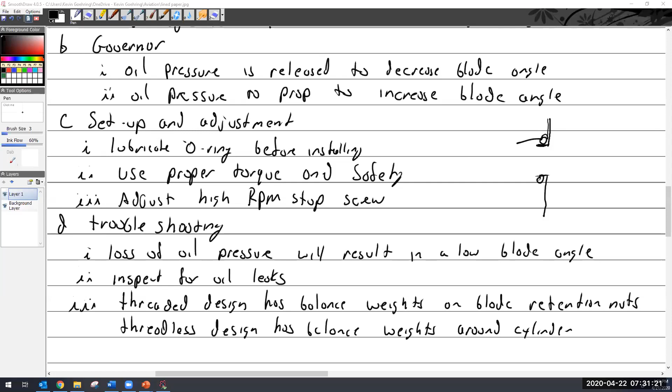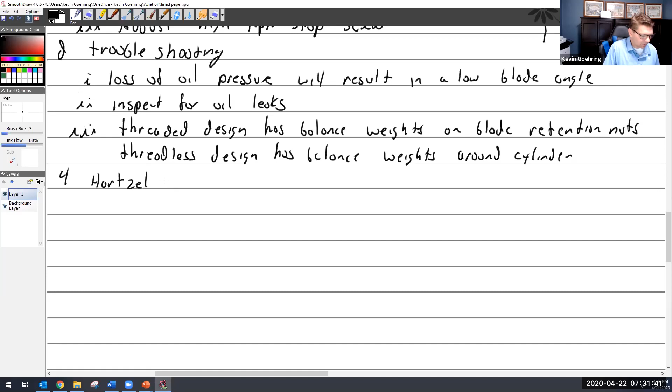All right, so the next one we're going to talk about is the McCauley. Let's move over to Hartzell. So we'll do the Hartzell prop. Let's see which one we're going to do here. We'll just go with this one. So, prop designs.

Hartzell has two types, and it gets kind of confusing. I don't really like the way they call it. Sometimes I think everything with props was designed to be confusing.

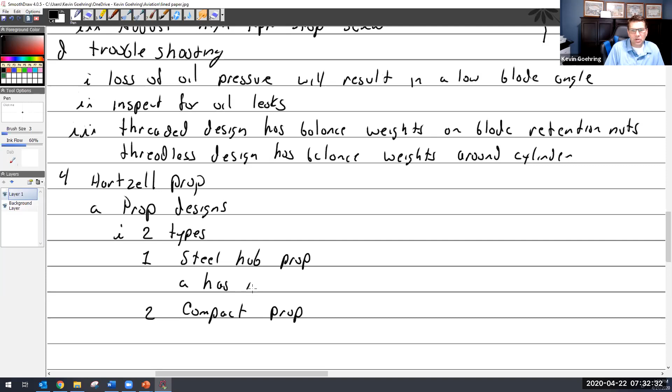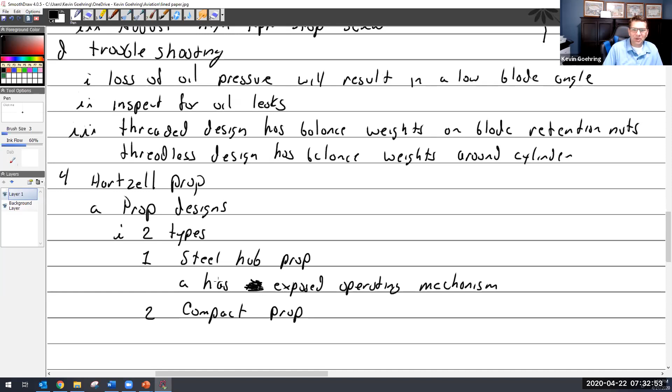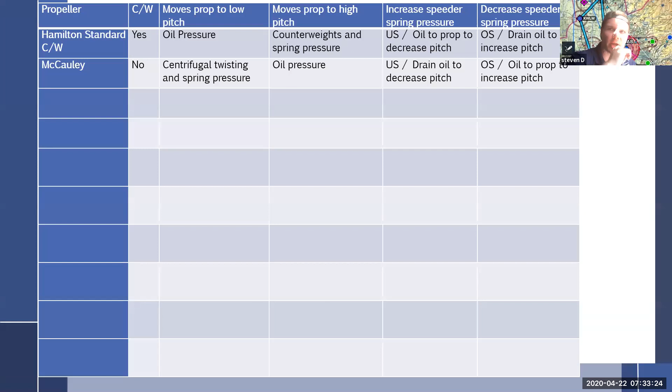Hey Kevin, I have kind of a question for you. As we move towards the Hartzell props, out of the two, Hartzell and McCauley, just on your preference, which ones do you find to be better propellers? I know they're basically the same manufacturing quality wise, but if you were to choose one for your aircraft, or as an AMT...

I honestly have no opinion on this. That's only because I don't have massive expertise. I never worked for a prop shop. But if you asked, would I rather have a Continental or Lycoming, even if I was an expert on these two, I'd still have no opinion. Each one has its benefits and each one has its downsides, so it just doesn't matter to me. It's almost like sometimes you just get what you get and don't throw a fit. So they're all great products.

And the compact, like I said, the reason why I hate it, it's very fat, so I don't know where they get the compact from. I'm sure somebody had some idea and they could tell me exactly what they meant by compact, but the exposed stuff is the steel, and that's kind of what I go for. I go, okay, I can recognize the steel and everything else is therefore the compact.

So let me see here, let me just go scroll through these. Well, I was looking for a good picture, but there we go. It tells me I'm done with pictures. So if we can look at this one, it's a little difficult because it does have the big spinner on there, and you're trying to make heads or tails.

Does this have exposed parts or not? It's even a little hard for me to tell, because this looks like an exposed part here, but I don't think that's it. I think this is more. It looks like a steel one to me because of this long nose. Let me see, get something definitive going here.

Okay, so this one is definitely a compact because there's no external mechanisms. Same thing, just close up. And that's another compact. And that means it's the end of that particular prop.

So let's talk about what we can see. Let me see. Oh, that's wrong with that. Okay, back over here. I think that was the first slide. There we go, first slide. Okay, so what do we got going on here?

I almost don't love that picture, but we can see a couple things. One, there's a gigantic spring in here. Two, it's got counterweights. Three, it's got heated boots on it, which we'll get into much later. But otherwise, that's a steel.

That's a complicated picture there. Let's go to something just a little bit easier for you guys to look at, and I'll go to one more. It's a close up, there we go. Okay, so we've got a couple of things: one, counterweights and a big old spring, and it's got a Schrader valve.

If you haven't heard that word before, Schrader valve is really what we call air fittings. Because it's got an air fitting, that tells me number one, it's got an air charge to it. Number two, it's got a spring. Number three, it's got counterweights. And four, we know we've got oil pressure somewhere. So because it has counterweights, centrifugal force makes it go to a high blade angle.

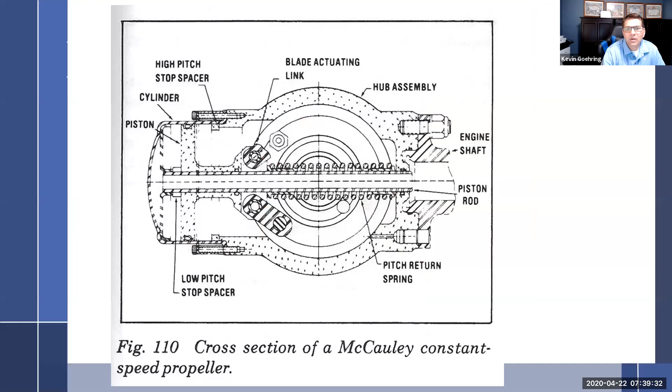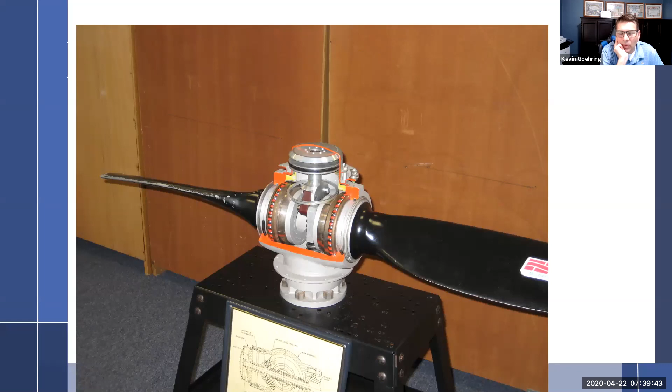In the McCauley, we'll go back one to the McCauley. What made it go to a high blade angle? High blade angle towards feather. We'll go all the way to the beginning picture. There we go. Well, what made this one go? Oil bleeding off. What made it go to oil pressure bleeding off? Centrifugal twisting force is our main force without oil. Centrifugal twisting force will make it go to low blade angle because there's no counterweight. So in this particular propeller, if I lose oil, it's going to go to high RPM, low blade angle, right? Yes.

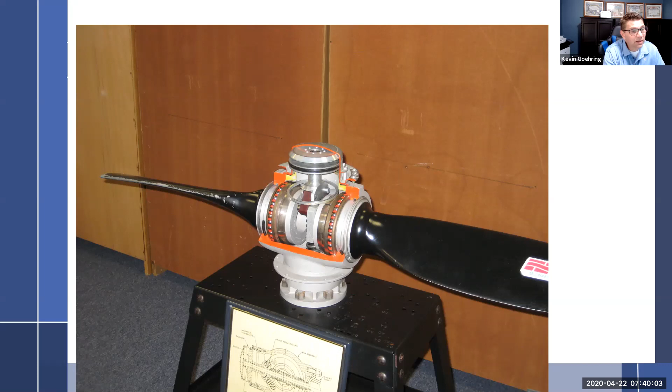Opposite of feather. Now, if I'm flying around in a twin and I lose oil pressure, what do I not want to have happen? This. Windmilling. So if I lose oil pressure, my engine goes away, I have a catastrophic failure, an oil line breaks, something happens, oil spills all over the place, I've got to shut down my engine. I want to be able to feather my prop. And what does it take to feather this one? If it did feather, which it doesn't, would be oil pressure. So that is really bad.

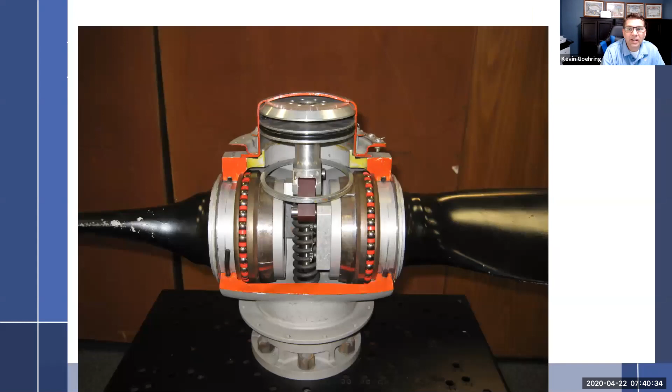So that's why on any sort of feathering propeller, you're going to find counterweights, because when I lose oil pressure and it drains off, these counterweights are going to take it all the way to feather. And that's what they're there to do. That's why on a twin or any sort of feathering propeller, you will always, with some exceptions, find counterweights. I think there's one prop that uses spring and oil pressure alone without counterweights. So you can do it that way, but you have to fight centrifugal twisting force to do it. So this way, centrifugal twisting force is always going to drive it towards feather. So it takes oil pressure to keep it out of feather, if you want to look at it that way.

So if I lose oil pressure, it's automatically going to go all the way to feather because there's nothing else to countermand it. That's why you're always going to find counterweights on a twin, and that's why it's reversed.

Okay, so why then does a single not have counterweights? Is it some sort of, well, if we lose oil pressure, we want it to always go this way or that way? I don't think so. I think it's just a matter of complexity. Why add weight if you don't need it? If you don't need counterweights and they weigh something, just get rid of them. It just makes things more simplistic, and you reverse the governor pilot valve to do something different, and you're fine. So just keep things simple.

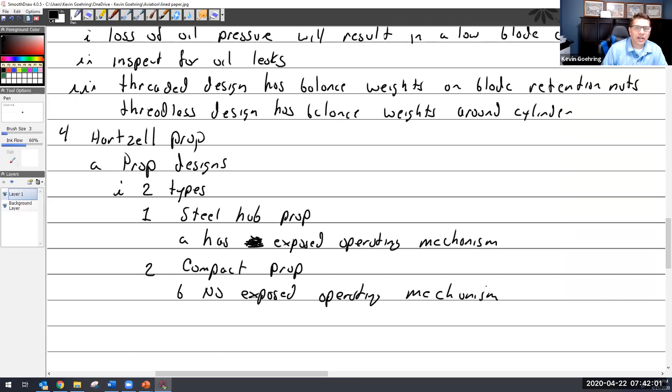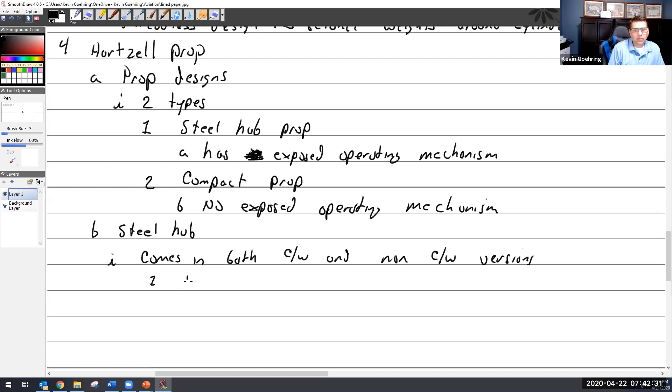So what kind of notes can we put about the Hartzell? We have the two types there. The steel hub, we'll talk about the steel hub. It comes in both counterweight and non-counterweight versions.

I'm not going to take a bunch of your time to write all this because it's being redundant. So what I was going to write is the counterweights use oil pressure to decrease blade angle, and non-counterweight uses oil pressure to increase blade angle. So nothing's changed.

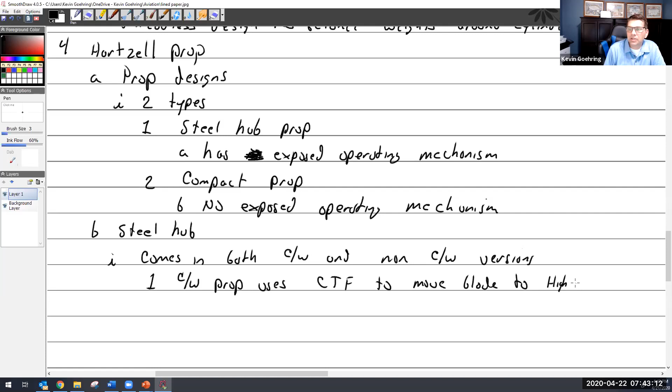I'm going to write one more time, but a little bit different. A counterweight prop uses centrifugal twisting force to move the blade to high pitch / feather. And a non-counterweight prop uses centrifugal twisting force to move the blade to low pitch. That's just, for the most part, not going to change.

So keep that in mind, we don't have to keep writing it over and over, and then you won't complain to me that your fingers hurt, and then I won't get a bill from you going to the finger chiropractor. So anytime we have a feathering prop, we'll put this here: if it is a feathering prop, it will usually, there are some exceptions, have counterweights.

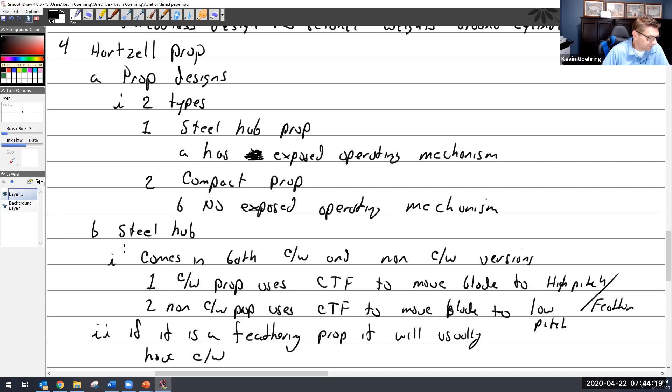Okay, so let's see, the compact hub. It's the more modern style. I'll just put this one: uses an aluminum hub.

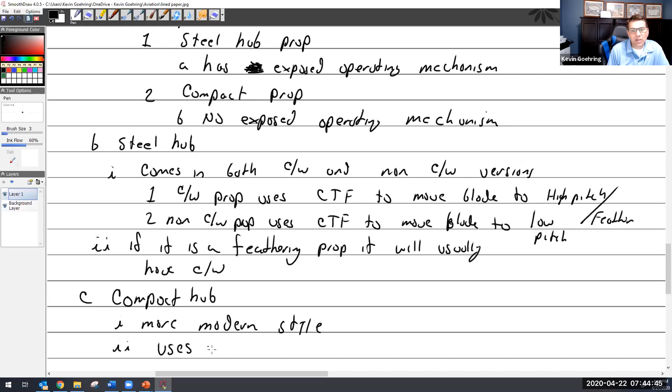Okay, here's where we need to get into some nitty gritty. So the design factor, you should always be able to look at the design factor and just say, okay, counterweights, this thing must be feathering. No counterweights, it's not feathering. You go up to a twin and you don't see a counterweight, I'm gonna start asking some questions. Why does this thing not have counterweights? What's going on? What makes it go to feather then if I lose oil pressure? Because that's always the thing you want to concern yourself with.

But maintenance - as far as props go, if I had to sum up what it is you need to know, what I want to know about working on a prop, really it's going to come down to these maintenance things. So number one, if I've got a McCauley, I know that I've got to be cautious and look for oil leakage. And I know that there's not much else I can do to this prop as far as lubrication goes. This doesn't get lubricated, but if I see any red dye, that's a big deal.

It's coming off right now, not another flight, not a 'hey, let's watch this, let's wipe it.' I see red dye, it's game over for that prop. It's going to the prop shop to find out why. You can argue that it's probably a seal, but every time I have, every story I've heard about a prop shop getting a McCauley because somebody said it had a bad seal, they also found a crack. And we talked about the centrifugal force on these props, and it's tremendous, and you don't need it flying apart. All right, so that's McCauley.

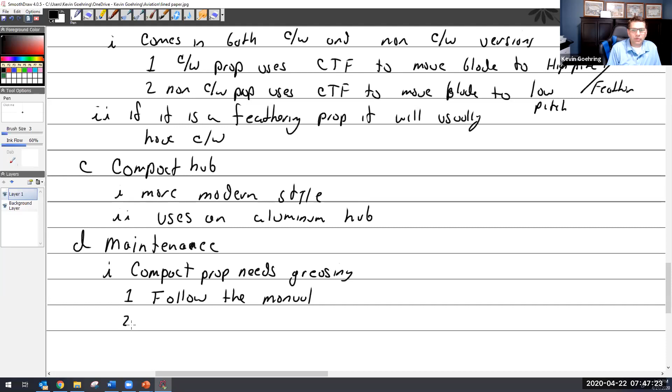The greasing requirements change, and they've changed since I've been in the field. So I'm really reluctant to tell you anything other than follow the manual. Follow the manual, or call a prop shop. That's what they're there for. You get a good relationship with a prop shop, they'll help you out.

But the way it was, you had to remove one of the grease fittings. Remove one of the grease fittings. Also called a Zerk fitting. I think it's spelled Z-E-R-K, Zerk. Like the emperor. No, that's Zerg.

You remove one of them, and then you add grease to the other. What they say is it's preferable to apply grease to the fitting located nearest the leading edge of the blade on the tractor, and then fill that one. I think at one point - I don't even remember if it was true or it's just what people were doing - they were removing a greaser and then filling it until you got fresh grease coming out of the hole.

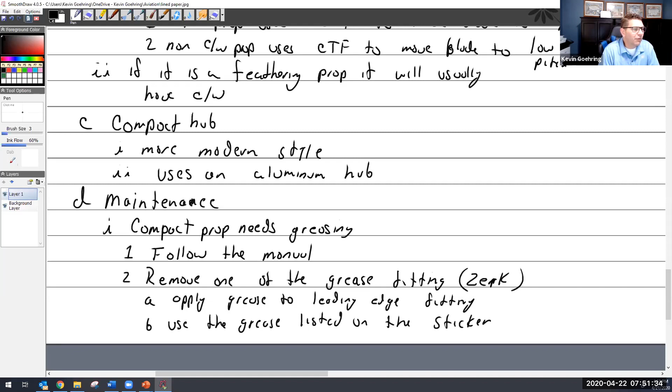The little nub is called a grease Zerk, or the grease fitting. So that's what I'm talking about. You're going to remove the opposite side, put in 4 pumps because you get 1 ounce per pump, and then you're done. Okay, that makes sense. I was always wondering what that was, what that would go to. Let me see if I can find a nice picture here. I have bad dreams about Zerk fittings.

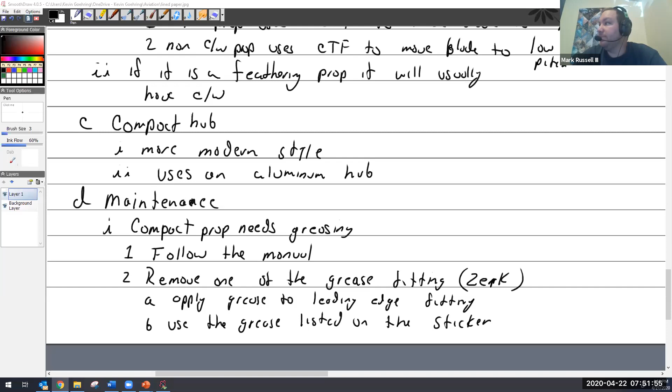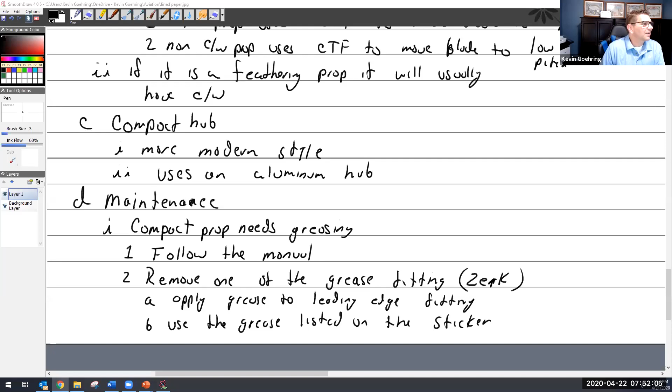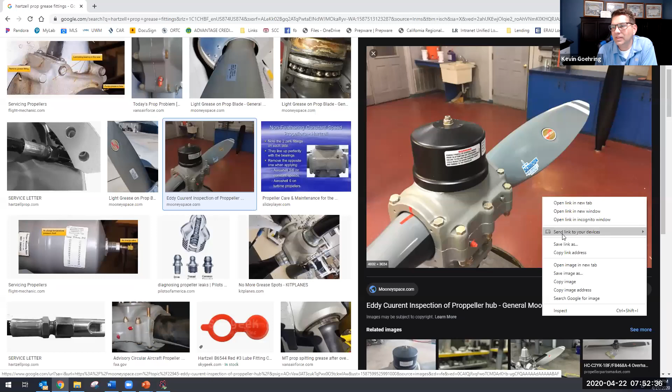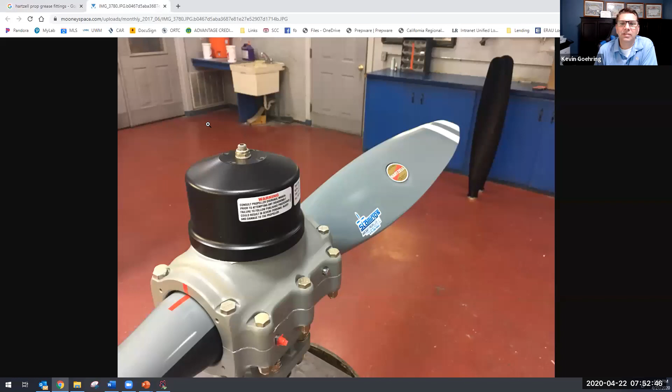Let's see. And there, did I do it right? No, mooneyspace.com, let me see. Open in a new tab. There we go. We'll do that, look at this. There we go, now my mic's in the way, I can't see it. Okay, so there's one fitting, there's the other.

But this one's been capped. But sometimes you'll see this right here and right here, and on the opposite side you'll see the same thing. So what I'm guessing on this one, since I said you always take out one side and grease the leading edge - this is the leading edge here because it's the opposite. So there's leading edge, trailing edge. This is leading edge, trailing edge over there, because that's how it works.

So this is the one you're going to pull out, and this is the one you're going to grease. And on the opposite side, you're doing the same thing. So actually, this goes to this side, and this one and this one are the opposites - these aren't the opposites. So you're going to grease the side on the leading edge and take out the one on the trailing edge, which is over here. And you're going to put 4 pumps in - 4 pumps is about 4 ounces.

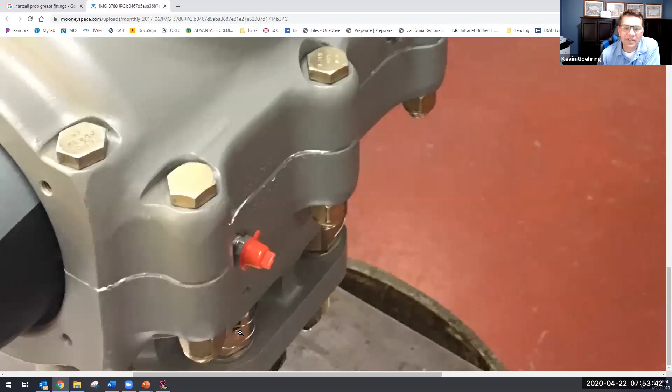Ooh, look at that - those bastard, what do you call them, nuts that are hard to get to, with the safety wire wrapped up in them. But they've got nice little caps on there.

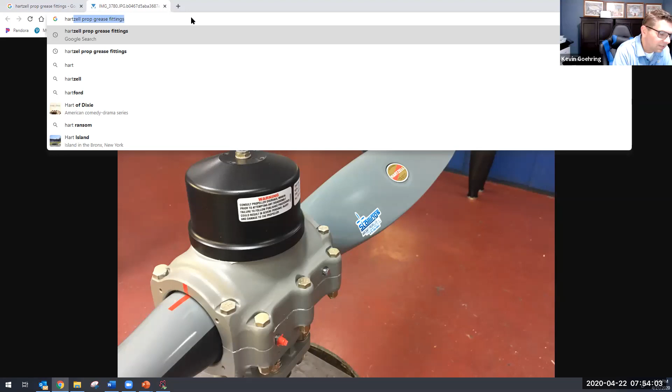Is that the compact style? Yes, absolutely, because it is definitely not the steel hub. Let me see if we got a good picture. Hartzell... so, steel hub prop images. There we go. That's it.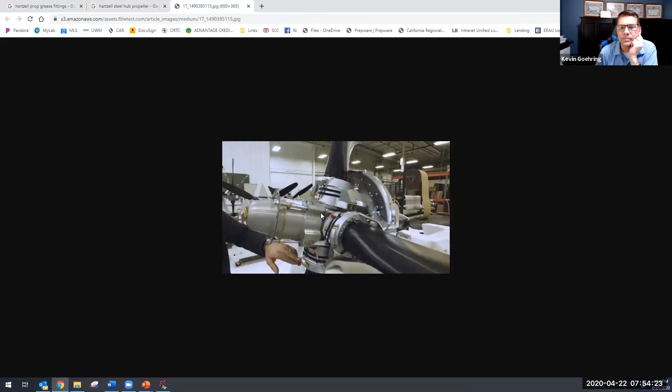Well, that didn't help. But see all the external mechanisms? You can always hit Control plus to zoom in, Kev. Control plus, plus - oh well, I could have done that. I could also hit Control mouse wheel. Woo, but thank you, the other one had a magnifying glass.

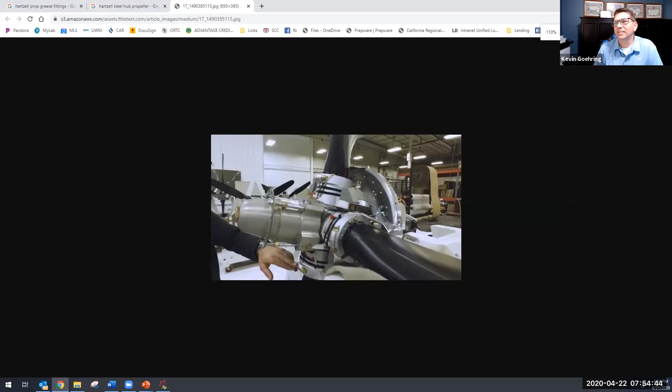All right, so that's your compact. Here's another picture - oh, I like that picture, that's a really good one. So you can see how the external mechanism right here is what I'm talking about. You're going to find this on a PT6 these days, so turbine engines, that's what they're going to be using still to this day. I believe that's the same picture I have - so that's the compact, because you can see the rods coming through here.

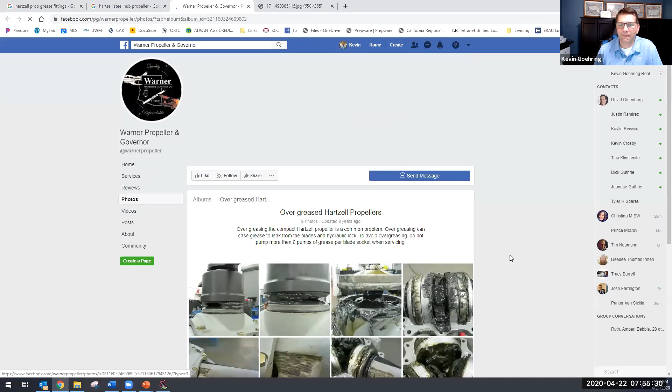So what is it showing, sorry - steel, in the one that says 'over greased Hartzell'? Is it here, right below the... oh, one, the cutaway. Oh, 'over greased Hartzell.' It's on Facebook too. Yikes. Oh, that's excellent.

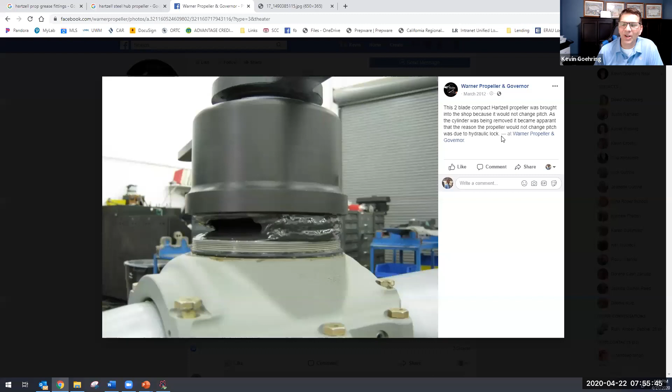Well, this blade was brought into the shop because it would not change pitch. As the cylinder is being removed, it became apparent that the reason the propeller would not change pitch is due to hydraulic lock. Love that. Oh my goodness, oh this is excellent stuff - a little bit over 6 pumps. I think, yeah, yeah, here's where the fittings go right there. Dang.

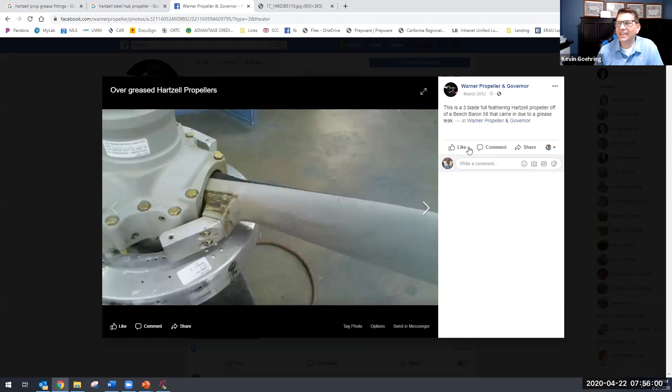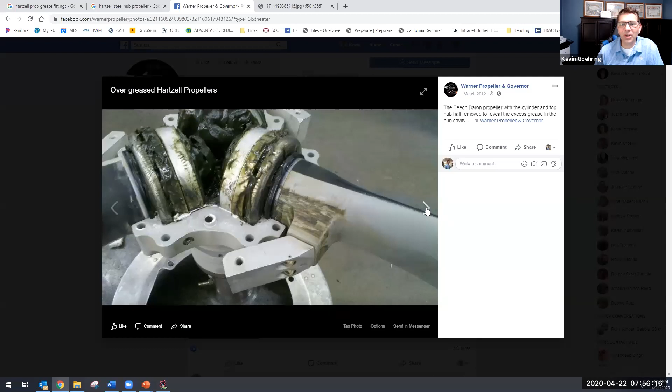Well, this is just a grease leak - or is it leaking because they forced it out? I think I actually had a mechanic tell me that one time, like 'oh, you just grease it till a little bit comes out over here.' Oh no, don't do that. Oh, that's ugly. Oh, there we go. So, all right, good pictures.

All right, so use the right grease, be careful with that grease. What else do I got here? Let's see, blade adjustment - steel hub props can have the low pitch adjusted by adjusting the blade clamps. I'm not going to get into that for you guys. Compact, yep, so we'll move on here.

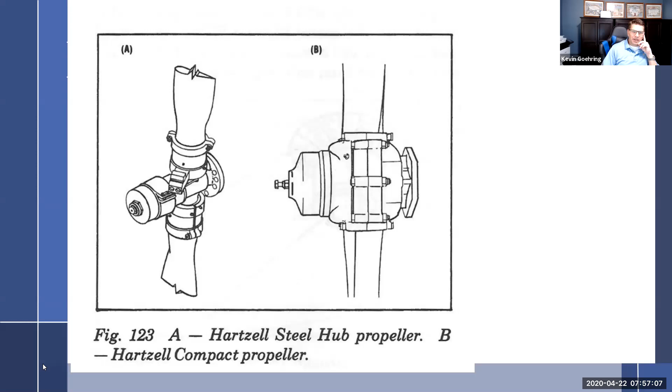So, number 5 - we're going to talk about feathering props. Not that some of those weren't feathering. In fact, we can go over here and go back to where we were, just finish that out. So, all right, so we have the steel and the compact. That is because of the change rod right here - you can tell that it's steel hub, and it's still, everything works about the same.

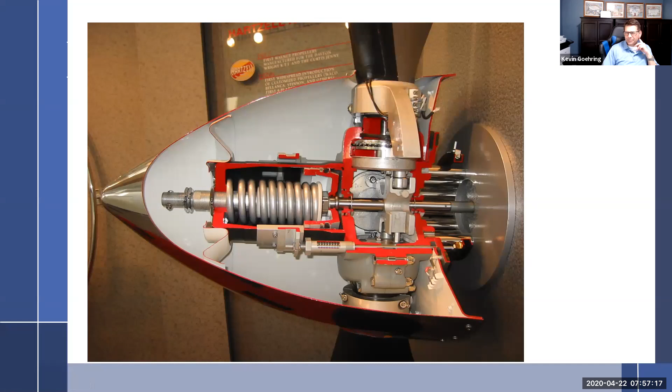No big surprises. And I got to get into the air pressure here. I'm sure I do. Okay, I just kind of go back and forth.

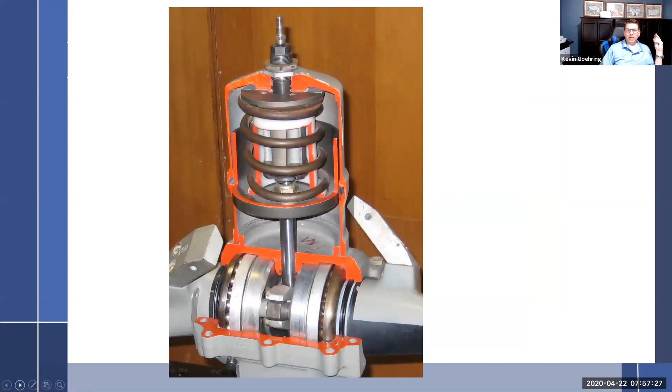The Hartzell steel hub prop is counterweighted. I talked about a non-counterweighted version, so it comes in both. For the non-counterweighted version, centrifugal twisting force goes to low. My pictures aren't lining up with what I'm talking about. If you have a steel hub without counterweights, centrifugal twisting force goes to low. If you have a compact prop without counterweights, centrifugal twisting force also goes to low. We know that everything is pretty much the same.

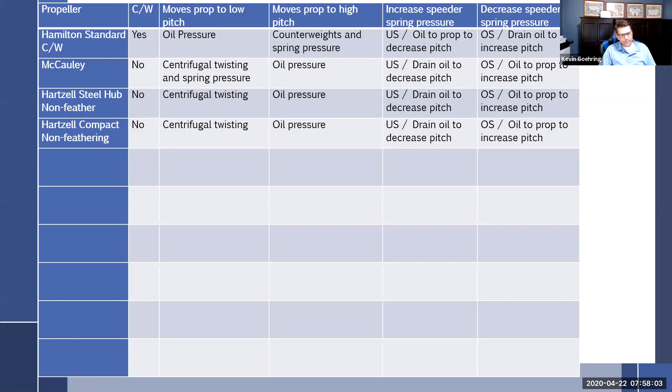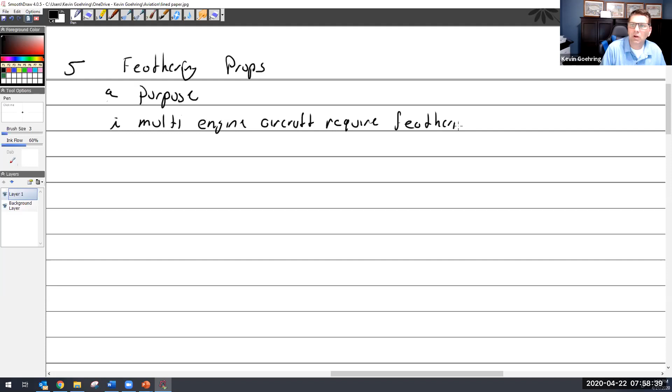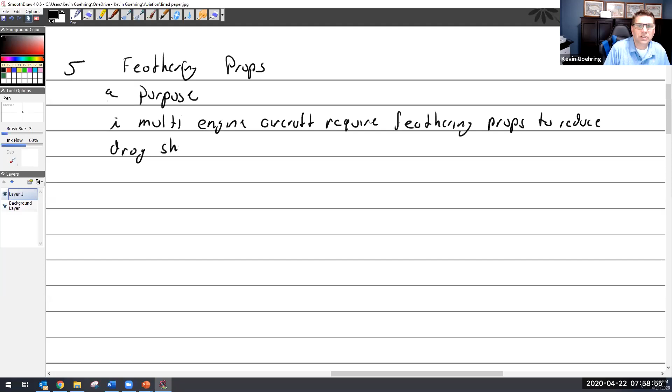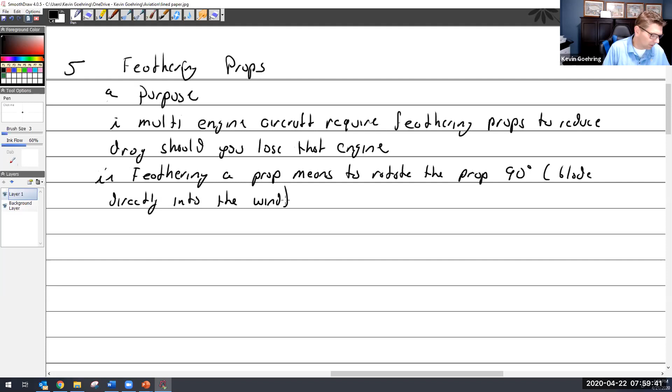Let's talk about feathering props, which really matches the pictures I just looked at. Feathering props: purpose. Multi-engine aircraft require feathering props to reduce drag, should the aircraft lose that engine. So you lose one engine. Feathering a prop means to rotate the prop 90 degrees, so the blade is directly into the wind, in order to stop the prop and engine from windmilling.

What am I going to write there? Fuel? No. Very few single engine aircraft have a feathering prop. In fact, I think it's only a couple of ag planes, spraying planes, crop dusters, that have something like that with the PT6 on it. I believe they're just using the Hartzell steel hub, which already came with counterweights, so they just left them on there.

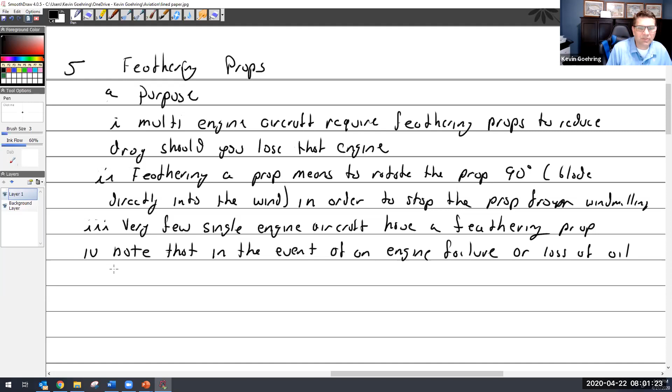Note that in the event of an engine failure or loss of oil, the prop needs to feather without the use of engine oil. I'll just say oil pressure from the governor. So in other words, you just lost all your oil pressure and you want to shut the engine down and feather the prop. The last thing you want to say is, well, I should have thought about that before I lost all my oil pressure. So the only way to solve that is to take off and feather your engine while you still have everything usable, right? So that doesn't make any sense otherwise.

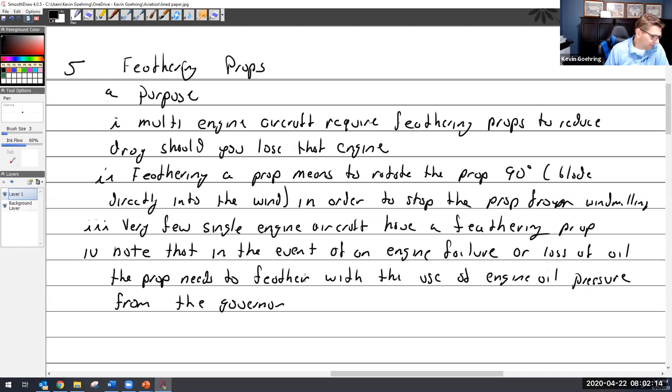Where was I? If you lost an engine and it was windmilling, would there be enough RPM to continue to lubricate everything off the engine-driven pump, or would it be too low of an RPM for adequate lubrication? No, it would work, because the prop is moving at the same speed as the crankshaft. So if you lost, say, your entire ignition system, the engine is sitting there windmilling, but you just don't have spark. Because you have no ignition, you have no power, but it's running. The rest of the engine doesn't know that. So everything will work, except you won't get power out of the cylinders. The oil pump will go and lubricate the engine. The governor will work, trying to go over speed, under speed. The fuel system will be working because the pumps and pistons are going and air is coming through, injecting fuel. So absolutely everything will continue to work, except you won't have any power, barring that wasn't what failed in the first place.

That's why I said ignition system. But let's take the example that a cylinder failed catastrophically, where you actually lost a piece of the cylinder and part of the piston, and a rod came through the side of the case, flinging all over the place. I've actually heard stories of people running an engine that way and not doing too bad, it ran rough, and they wondered why. But if you realize that and pieces are coming out of the cowling and you want to shut it down, you want to be able to shut it down without oil pressure. That's the whole point there.

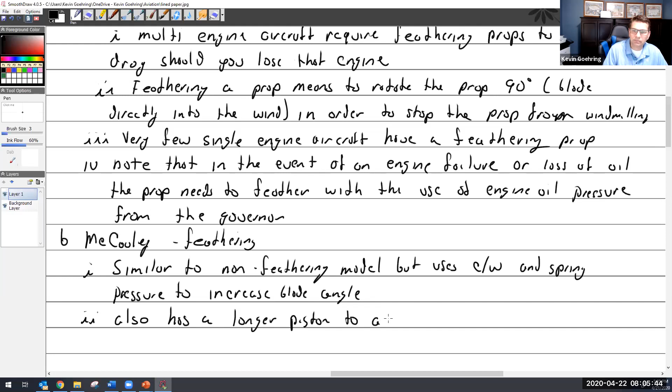To accommodate longer blade travel. Because the travel is really limited by the length of the piston.

I don't have a picture of anything like that. I'm very sorry about that. Fail.

Let me see what's going on here. Let me see if we can get rid of this one.

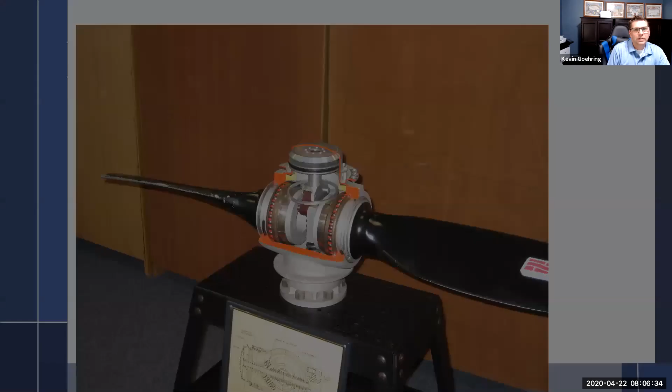So what I'm saying is right here, this is a real shorty right there. So if this were on a feathering prop, this dome comes way up. It's much, much longer because the travel on these blades is really very small. But when you go to feather, that's a lot of travel, so it's going to be much, much longer. Let me see.

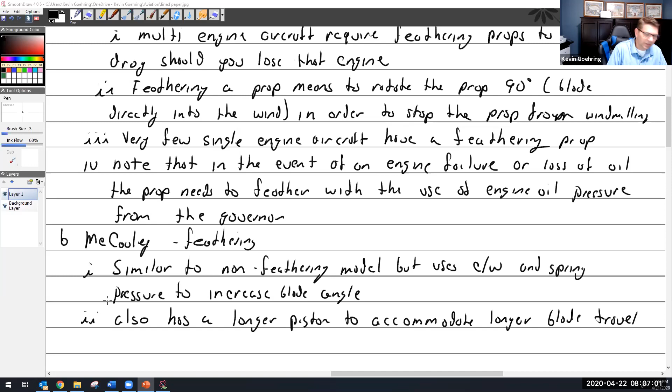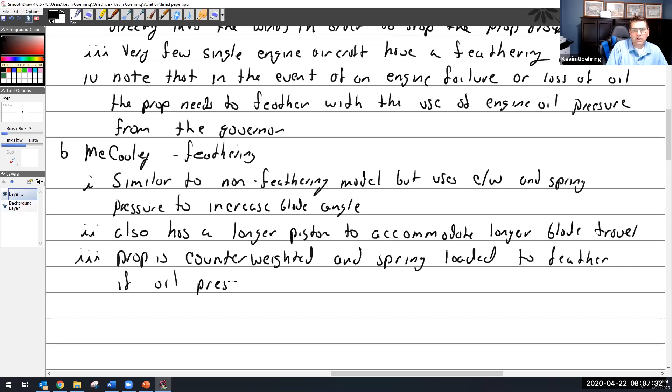All right, so then I will say this, which is getting a little redundant: the propeller is counterweighted and spring loaded to feather if oil pressure is lost, which is good and bad.

If you are flying along and something happens to your aircraft and you suddenly have a complete and total loss of engine oil pressure, the prop is automatically going to feather out on you. And that's something that I would want, except for

maybe two scenarios. One is during takeoff, and it depends. And I don't want it to do that when I shut the aircraft down, because I remember I told you that it is really difficult to start these aircraft if the prop is feathered.

It's a tremendous amount of air load on the propeller, like an oar, some sort of blade just going through the air like that. It's so much wind resistance that it's really hard on the starter, burns up starters. So you couldn't actually have a starter that's going to have much of a life if every time you went to start one of these twins the blades are in feather.

So you have to prevent it from going into feather when you shut down. So the prop has to know whether you're shutting down because you have a problem or because you're just shutting down to go get a hamburger. And so the way the props do it is that it has a feathering lock in it. There's different designs of feathering locks that have gone through kind of an evolution.

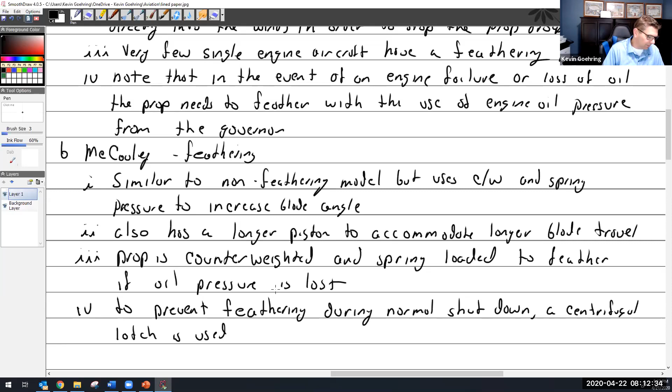During normal shutdown, a centrifugal latch is used. This prevents excessive loads on the starter.

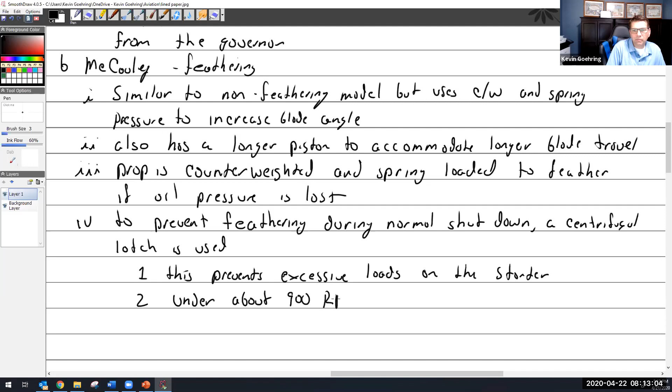Under about 900 RPM, the latch engages. The latch engaging prevents the prop from feathering.

The latches only engage and work under two situations: one, it's got to be under 900 RPM, and two, the blade has to be in high RPM, low pitch. At that point, the blade comes around—let's just say it doesn't really work this way, well, it kind of does—it brings around a slot where the feathering latch can engage. At over 900 RPM, the latch pins disengage because centrifugal force pulls them out. Then the prop rotates and goes into a higher blade angle because you're using it. If you were to bring it back to idle, the latch pins miss their hole and can't latch it, so you can go right into feather. It misses them. If you're watching the video when I did that, that's probably the best explanation I can give you, because that's how they work.

But what happens if you're on takeoff and you're not under 900, but it's going to begin to feather, and you're losing it? Well, if you're on takeoff and not up to 900, then you're not taking off—you're idling on the runway. Well, yeah, but you said it latches under 900, right? So it will only feather if it's above 900.

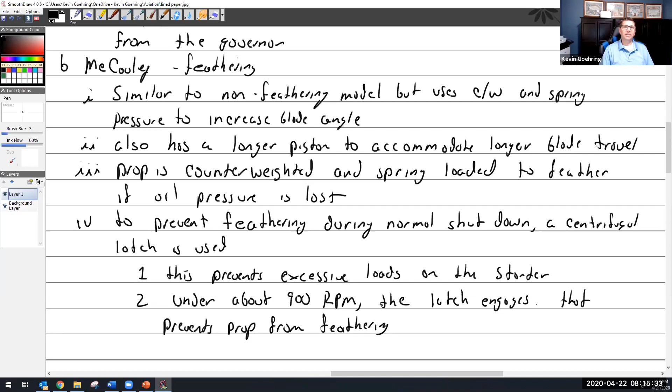Yeah, well actually, if you're in a twin and you're talking about losing an engine on takeoff, there's actually a switch in the cockpit for a lot of airplanes—it's auto feather. It automatically feathers them. You want it to feather, that's a good thing. So you're going to be over 900 RPM, and you're also going to have the governors engaged, and it's probably not going to be on its low pitch stops. It's going to be a little bit beyond that, which means the feathering latches aren't going to find it—they're not going to hit the hole. So it's going to feather.

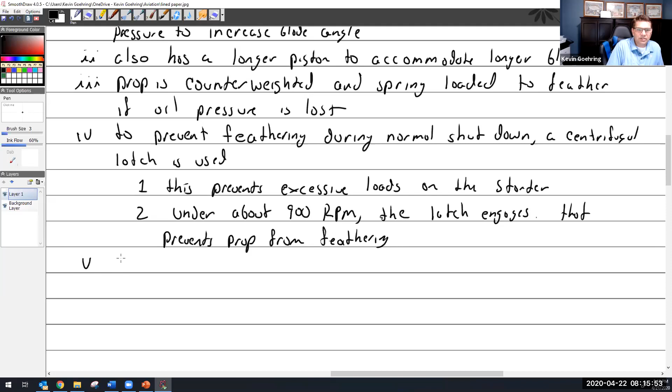But how do you feather a prop? You're flying along and you want to feather it—how do you do it? You can't just drain all the oil out and say it'll feather as soon as I run out of oil. Well, that's true, but you don't want to fly around doing that. You've got a problem, you want to shut it down. So, governor. What does the governor look like? All right, so to feather, the governor incorporates a lift rod.

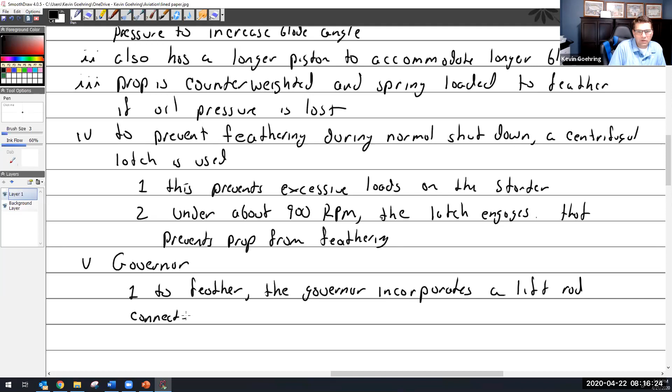connected to the speeder spring. Connected to the speeder spring. Steven, is your microphone still on?

Don't make me go look.

So what happens is you have the blue knob, and the blue knob, as we keep saying, is high RPM, low RPM. If you want to go to feather, you pull it back to low RPM, which, by the way, is going to be a high pitch angle towards feather anyway. Then there's a detent, and you go past the detent. There's a gate where you have to go around it and back down, so you can't inadvertently throw it into feather while just trying to go into low RPM.

When you go into that position, there is a cam that reaches over and grabs onto that pilot valve that's going up and down inside the governor, saying underspeed, overspeed, underspeed, overspeed. It literally grabs it and yanks it up, forcing all the oil from the prop to drain off. So the governor flyweights can spin around all they want, saying underspeed or overspeed, but it doesn't make a bit of difference because you physically grabbed the pilot valve and yanked it up, draining off all the oil from the prop. That's how it works. So you just drain all the oil off.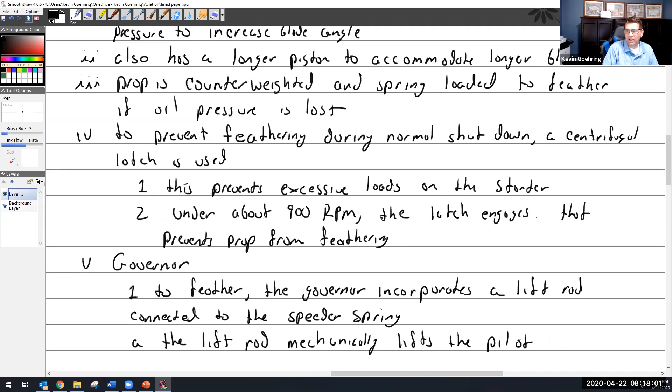So the lift rod mechanically lifts the pilot valve when the cockpit control is moved to the feather position.

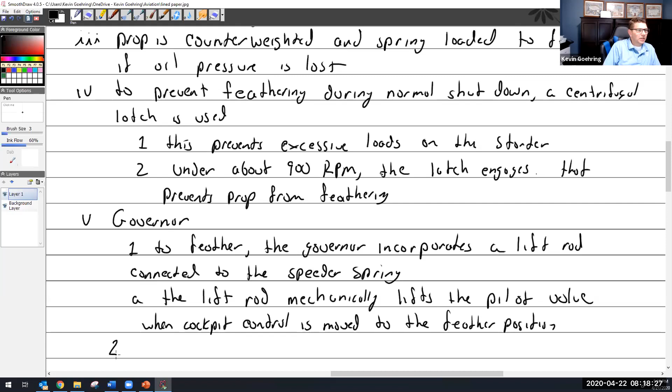So you're flying along, and maybe you're doing flight training, so you feather the prop, put the engine away, fly around on one for a while, and it's time to unfeather this thing. Well, how do you unfeather it? It depends on the system. Some systems have mechanisms to defeather it, and we'll talk about those when we come back from break.

They use an accumulator, which stores up a charge of oil. So you take the blue knob and go out of feather and bring it up into the normal position. It drops the pilot valve back down to normal operating range. But of course, the engine's not running, so it's going to say, hey, we're in an underspeed and we got to flatten these blades out. That's a good thing, because that's what you want to do, flatten them out.

So when it does that, it opens up a valve, and this charge of oil, because the engine's not running, there is no oil pressure, comes flooding into the prop, takes the prop from feather, brings it into a mid-range, and as soon as the wind hits it, it starts windmilling. When it starts windmilling, everything starts working. The oil pump starts working, the governor's working, now you've got oil pressure and a working propeller, and all you have to do is bring up your mixture, make sure your mags are still on. You're going to have fuel and spark, and boom, there you go. Engine's running, everything's back to normal, and you just realign the manifold and prop where you want it, and you're back to business.